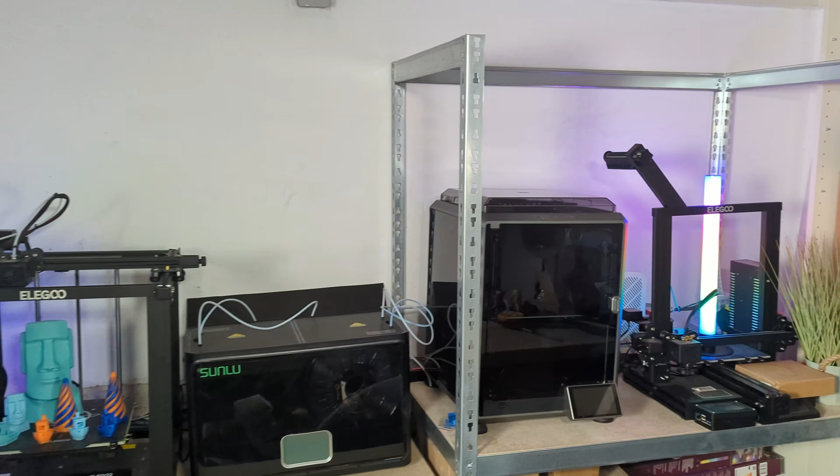And more importantly, who is a printer like this really for? Is this the perfect first step for a complete beginner? Is it a capable little workhorse for a seasoned enthusiast who needs a second machine? Or could this actually be the FDM printer that tabletop gamers have been looking for to rival resin quality without the mess and fumes? Today we are going to answer those questions.

We are going to push this little machine to its limits, from unboxing to high-speed prints and detailed miniatures, to find out if the Geeetech M1 is a toy, a tool, or something else entirely. Let's find out, and our investigation starts as always inside the box. Intro check complete. Engaging print protocols.

Let's start with the unavoidable unboxing and see what we get. There's a quick start guide and then another small brochure with additional instructions. We will see what it is when I set up the printer. A spool holder, then a small ring of filament to do the first test prints. Next there's a PTFE tube and some tools.

Besides an Allen key, a wrench, a needle and tweezers to clean the nozzle. The bag also contains a spare nozzle and an SD card. Furthermore, in the white box we get a 24-volt power adapter for the printer and a power cable. Finally, we have the Geeetech M1 Mini 3D printer itself.

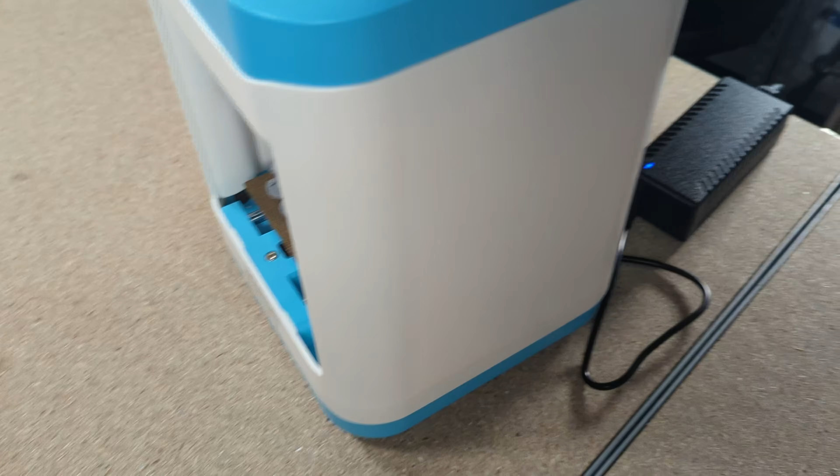So, the unboxing is done, and yeah, with its bright plastic housing it definitely looks like a toy. We've confirmed the first impression. But does it assemble as easily as a toy, or are we about to run into the complications of a real tool? Setting up this little 3D printer is as easy as following the steps outlined in the quick start guide. First, we remove the packaging from the M1 Mini.

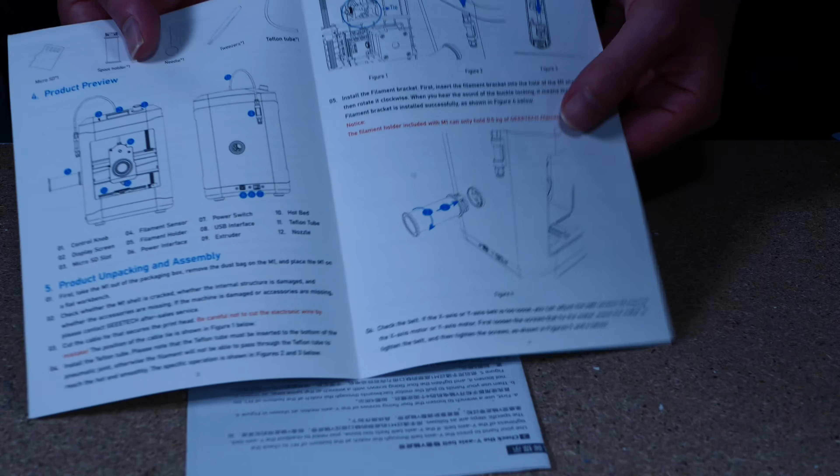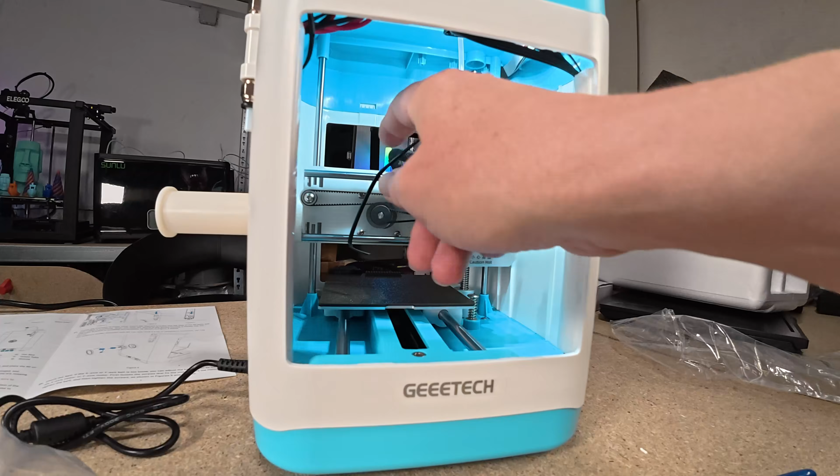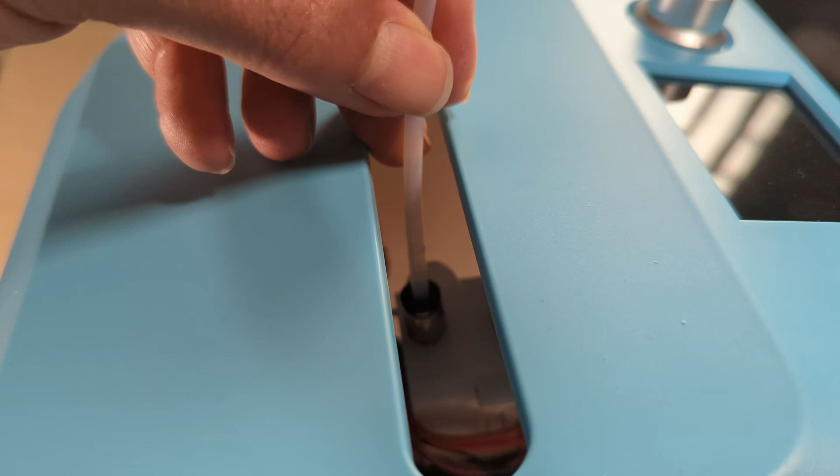Then we have to cut the cable tie that's securing the print head, taking care not to cut the wires inside. Now the Teflon tube has to be installed. One end goes into the filament run-out sensor and the other end is pushed into the print head. Make sure to push it until it doesn't go deeper, otherwise the filament may get stuck on the way to the hot end. The filament holder is installed at the side.

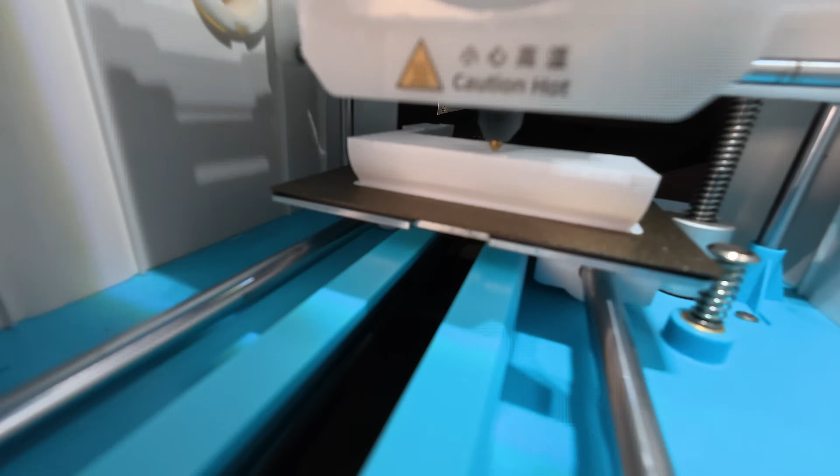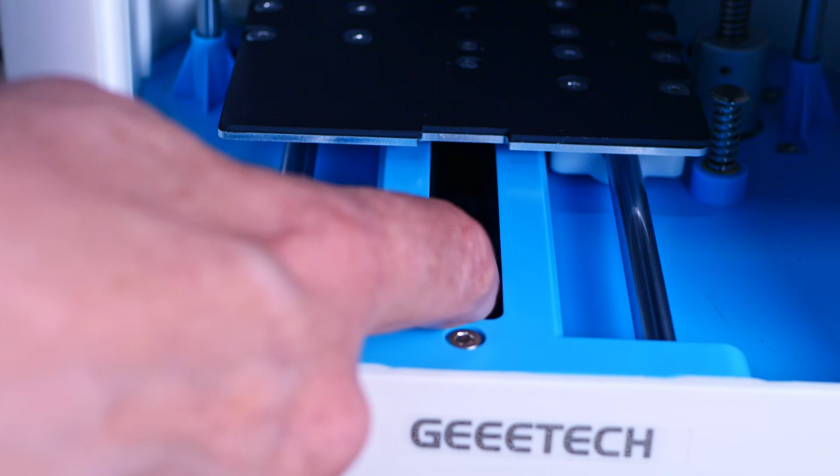It only supports 0.5 kg spools, but there's an alternative provided by Geeetech, which we can print using the M1 later, that can hold larger spools too. As a final step, we have to check if the X and Y axis belts are loose, and eventually adjust the belt tension following the detailed instructions given on the add-on paper.

And that's it. The physical setup was straightforward, just cutting a few cable ties, mounting the spool holder and checking the belts. So far it's certainly as easy as a toy. But the hardware is only half the story. The real complexity often lies in the software and initial calibration. Let's see if powering it on and leveling the bed is just as painless.

Ready for power on? Let's plug in the power adapter and turn on the M1 Mini. We should see the lights turn on and see the menu to operate the printer on the LCD screen on top. Before we prepare the first 3D print, we have to level the hotbed. There's a manual mode, but for convenience an auto mode as well. Turn the knob to select auto level and press it.

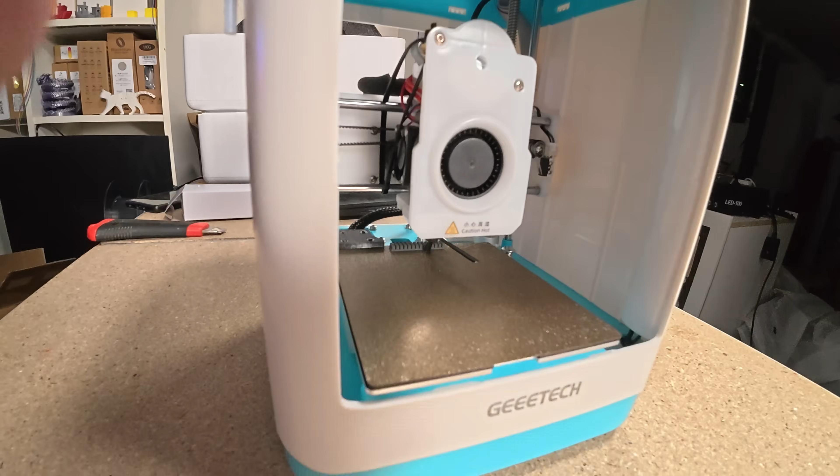Oh, okay, I overlooked one cable tie. Let's try it again. The printer homes all three axes, cleans the nozzle on the silicone pad at the back and then starts to probe the bed at 16 points. The nozzle cleaning makes sure that the probing is as accurate as possible. When finished, the display will show Geeetech M1 ready.

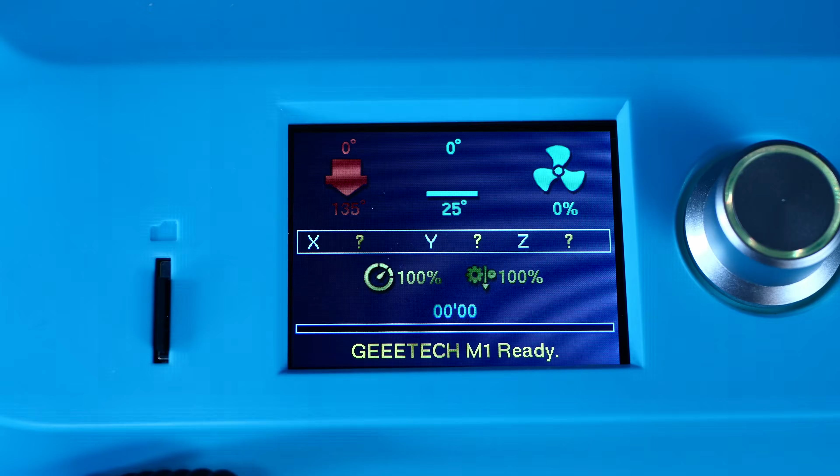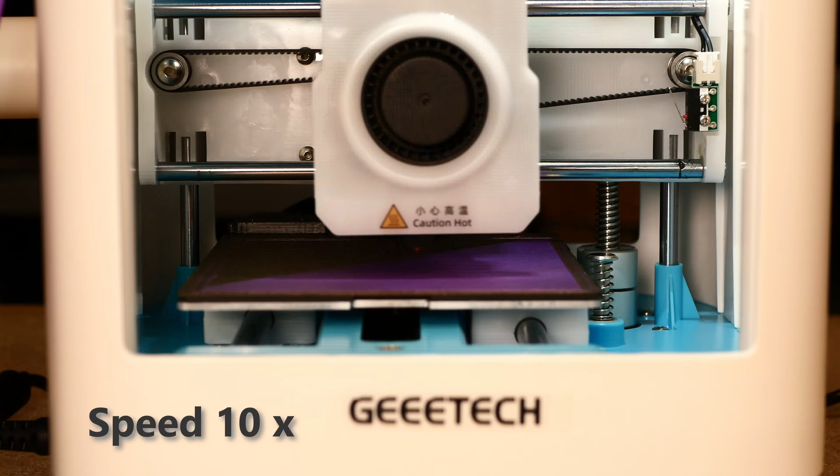Otherwise, it shows an error that we have to troubleshoot. But a perfect first layer is the foundation of every great print. So, after seeing that successful 16-point auto level, I wanted to put it to a serious test. I filled the build plate with a huge single layer square sliced at super fine 0.1mm layer height.

The result was okay, but as you can see, there are some small gaps where the lines didn't perfectly fuse together. This suggests that while the auto-leveling gets you very close, it might struggle with a first layer that fine across the whole plate. However, reprinting that same test at more standard 0.2mm gave a flawless result. A perfectly smooth, solid surface.

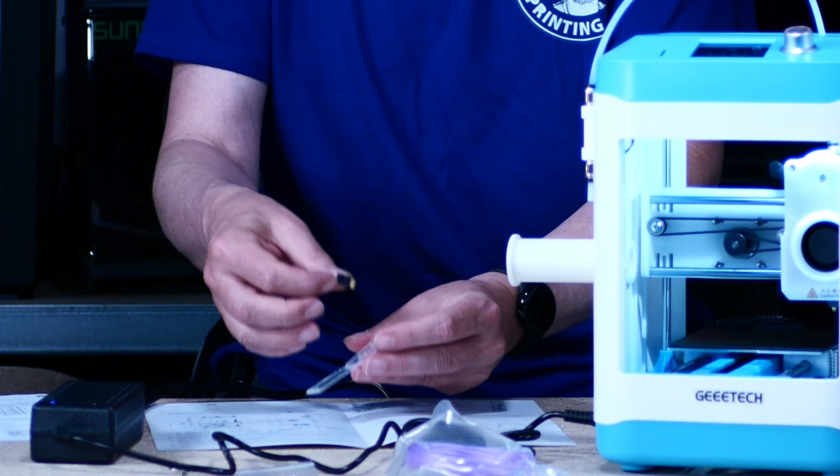That's a great tip to know. For this printer, a 0.2mm first layer seems to be the sweet spot for reliability. Before I explain how to configure the slicer to slice our models, let's check if there's already a test model on the SD card to do a first test print. I'd recommend making a copy of the microSD card so we have the files in case the card fails one day. But easy setup means nothing if the print quality is bad.

The SD card already has a Benchy on it sliced by Geeetech themselves. Can this printer deliver a decent result right out of the box in under 30 minutes? After inserting the microSD card in the slot next to the display, I select Print from Media. There are 3 pre-sliced G-code files. How else could it be, start with the famous 3DBenchy. The file name suggests that the print should last just under 30 minutes.

After selecting it by turning the knob, the print is started by pushing it and confirming to start the print job by selecting Print and pressing the knob again. The M1 homes, heats the nozzle to 135 degrees and then swipes it multiple times through the silicone nozzle cleaner at the back of the build plate. The hotbed and nozzle are heated to temperatures set in the G-code and it starts to print the 3DBenchy.

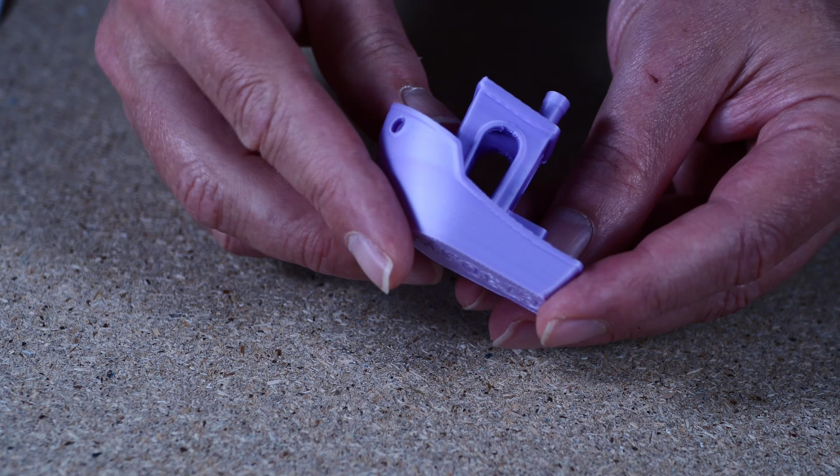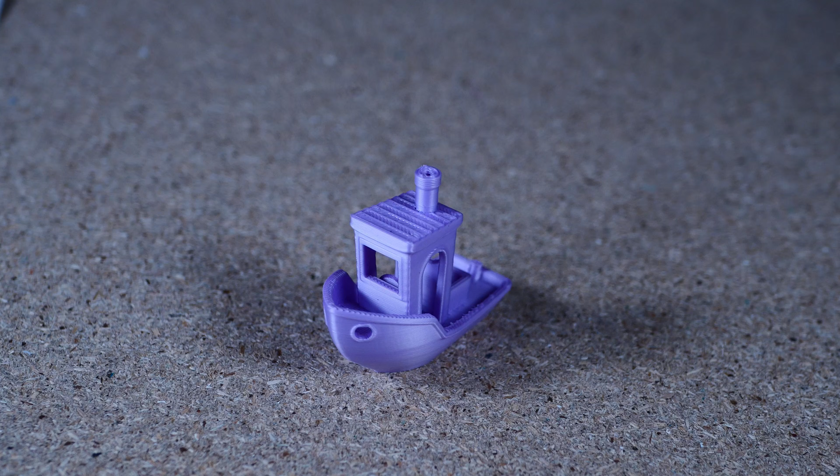The M1 not only finished the print in 29 minutes, but the result looks great too. If I had anything to complain about, it would only be that the chosen layer height of 0.25mm leads to this unsightly staircase effect, that the Z-seam on the chimney is too pronounced, and a minimal stringing which is really not worth mentioning. I can't see any ghosting or ringing artifacts, and the overhangs are also almost perfect.

There we have it. In just 29 minutes we have an almost perfect Benchy with no real issues to speak of. So it looks like a toy, sets up like a toy, but it prints like a serious machine. But why did it print so well and so fast? What's going on under this plastic shell that allows a printer this small to perform so well?

Now that we've seen the printer in action, let's take a closer look. The case feels stable and the mechanics look promising too. The printer allows access for maintenance from the front and back. It has no door. Because of this, it is somewhat noisy with this open design. On the left, we have a USB Type-B female connector with which you can connect your laptop directly to the printer to send G-code files for printing. I would have preferred to see a modern USB-C socket here.

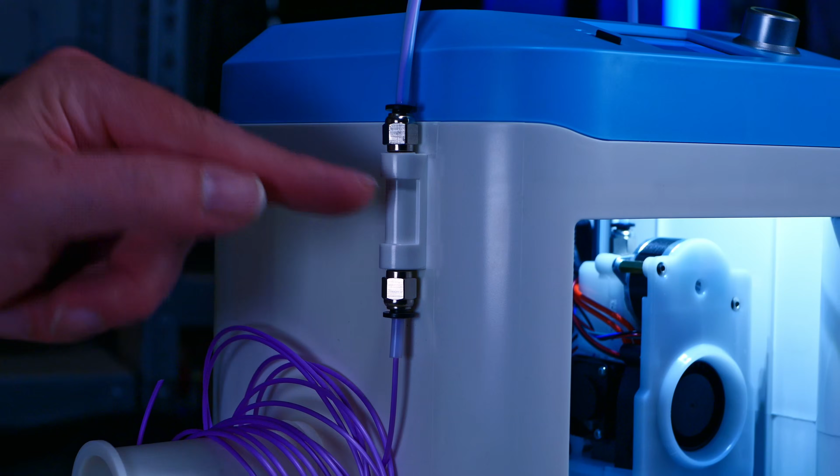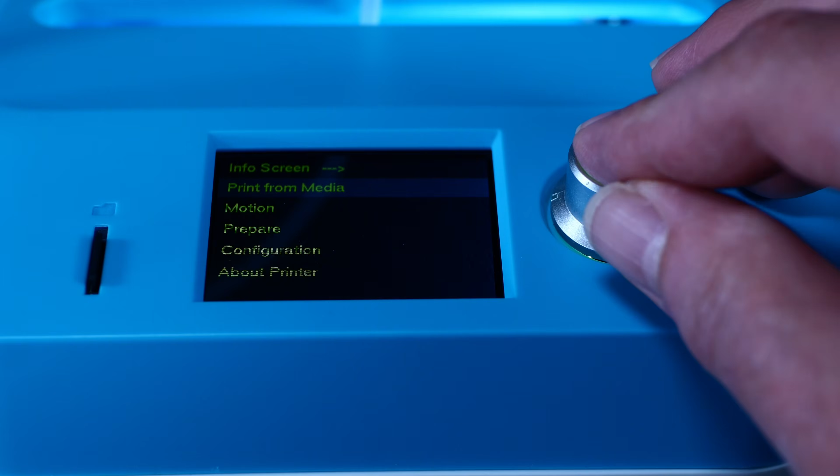Next to it is a power inlet and on the right the power switch. A little higher on the front left is a filament run-out sensor. It will pause printing in case it detects this. What I like is the fact that it can be disabled using the LCD menu on top of the printer. The menu on the LCD is structured in logical sections and the rotary push knob makes it easy to access and navigate through it. Let's step through. Push the knob to enter the menu. There we have Print from Media, Motion, Prepare, Configuration and an About section of the printer.

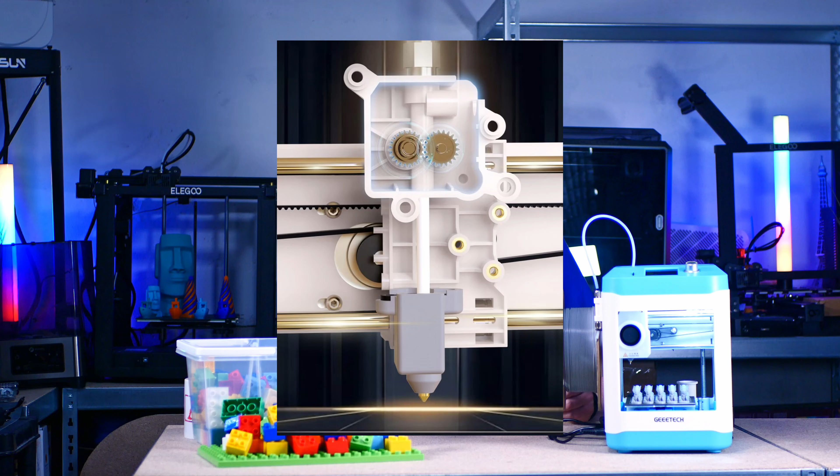The printhead carries a direct drive extruder using a NEMA 14 stepper motor, which should enable it to print softer filaments like TPU. I already have a functional TPU print in mind to test that. On the heated bed is a magnetic textured PEI plate. At its back it has a cutout through which the silicone nozzle cleaner is visible.

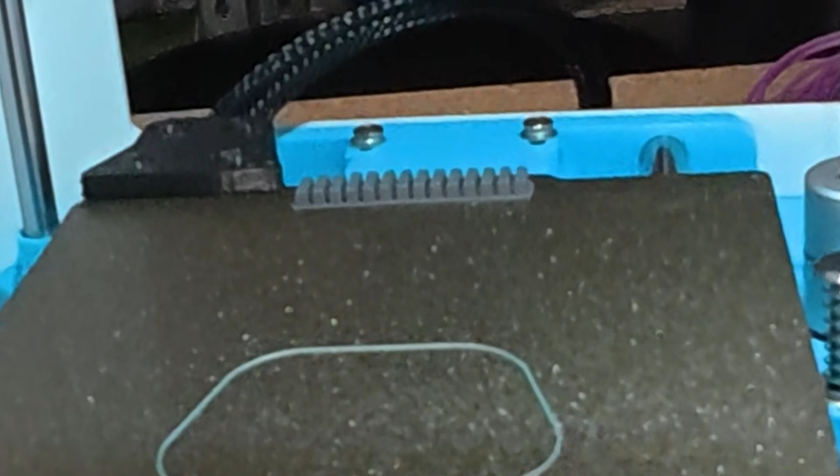Though you could level the Geeetech M1 Mini manually, it also has auto bed leveling that measures the print bed at 16 points. You don't need to do it for every print. Do an auto leveling when you feel that your prints start to fail. And while the idea of combining auto-leveling with an automatic nozzle wipe is great, it brings me to 2 firmware refinements I'd love to see Geeetech implement.

First, the temperature during that nozzle clean. It's set to 140 degrees Celsius, which feels too low to get some filaments properly soft for a clean wipe. Bumping this to at least 160 degrees Celsius, or ideally letting the user set it themselves, would make this feature much more reliable. Second is a homing sequence when you start a print.

The printer homes, cleans the nozzle, heats fully and then it homes a second time. This is risky. Homing with a fully heated nozzle can lead to a bit of oozed filament on the tip, potentially causing an inaccurate Z height for that critical first layer. The process should really be home, clean, heat, and then print. These aren't deal breakers, but they are kind of process refinements that would elevate this printer from good to great.

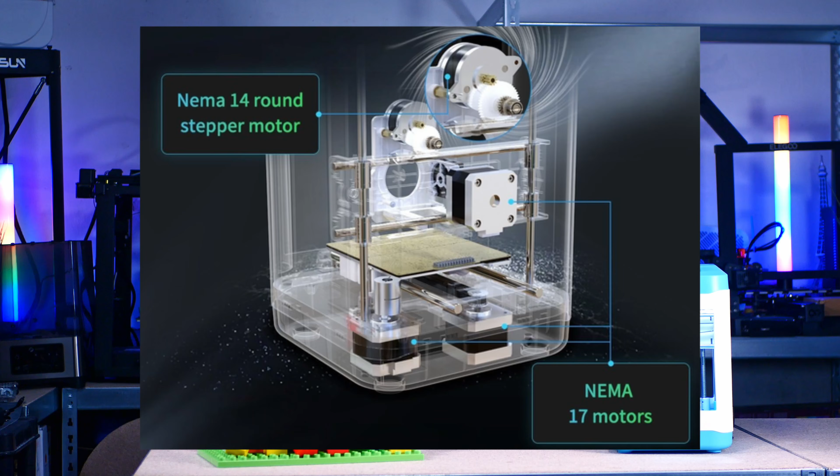During printing, 3 NEMA 17 stepper motors with their 200 steps provide enough power and precision to drive the X, Y, and Z axis. So, we now know the secret sauce: a solid Cartesian motion system with 3 NEMA 17 motors for precision, a powerful NEMA 14 direct drive extruder for filament control, and reliable auto bed leveling. This thing is packed with the hardware of a real tool.

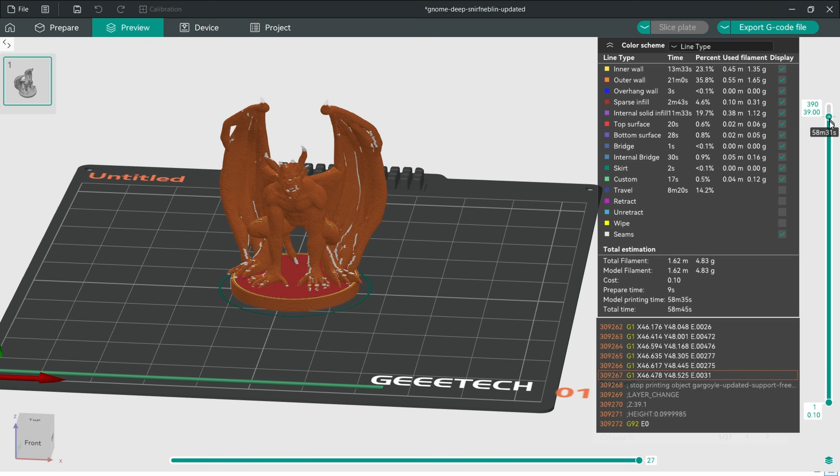So, we've established that the M1 is packed with great hardware, but great hardware is useless if you can't tell it what to do. How easy is it to set this printer up in a slicer to create our own files? Is it a plug-and-play experience or a nightmare of custom profiles?

Setting up the slicer is a no-brainer if you use a recent version of Orca Slicer, because it already has profiles for several Geeetech 3D printers, including the Geeetech M1 Mini. The only thing you need to do is open the printer settings, enter M1 into the search box, and it's there. The M1 has a 0.4mm nozzle, so just select that, confirm, and you're all set.

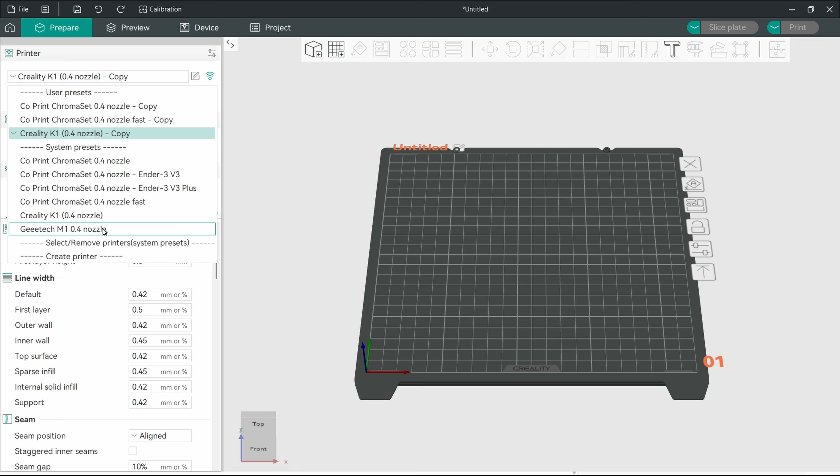If you prefer Ultimaker Cura, then the installation is a bit more complicated. You'll have to download the configuration files for Cura from the Geeetech wiki page. After extracting the files in the downloaded archive, you have to copy them to the correct path in the Cura installation directory. This requires you to confirm the UAC dialog that pops up when you try to copy them. Once done, you can add the M1 as a new printer in Cura and are ready to slice STL files using that printer profile.

And there's our answer. In Orca Slicer, it's an absolute no-brainer with a built-in profile. For Cura users, it's a bit more work, but still very manageable. Now that we have full control in the slicer, let's move beyond the pre-sliced Benchy. Can it handle a real technical torture test designed to push its limits on bridging, overhangs, and accuracy? To get a picture of the print quality of the M1, especially when printing at higher speeds, I sliced the micro all-in-one 3D printer test using a layer height of 0.15mm.

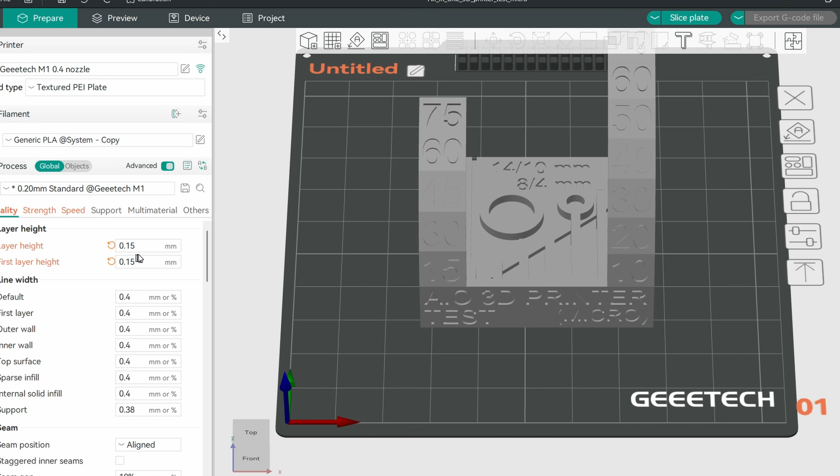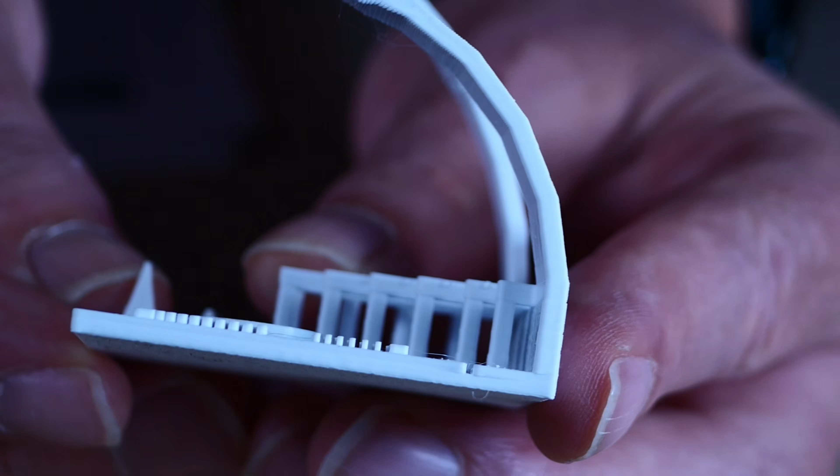The print took a little longer than an hour. Although printing with a 0.4mm nozzle, the fine feature gaps print okay to 0.2mm. The two cones printed nicely too, with their tips as sharp as one can expect from the nozzle size used. The bridges are good as well, and show no sign of drooping lines even for the 25mm bridge.

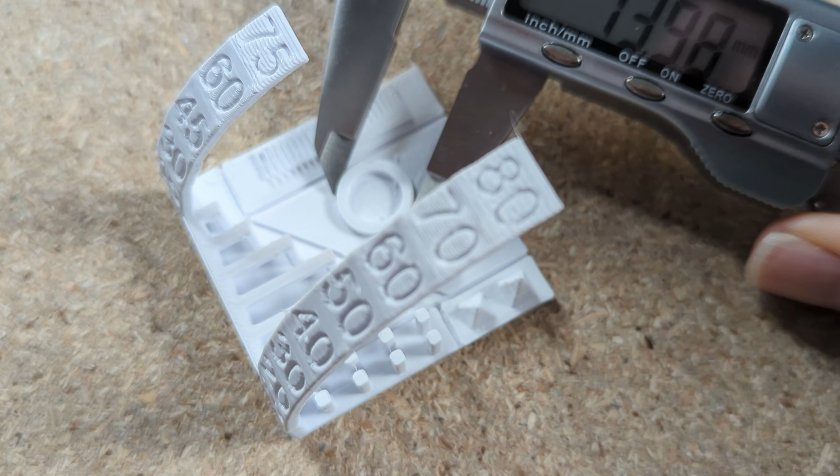The M1 handles overhangs of 70° without problems, but they start to get worse at 75°. The tolerances of the two circles are okay, with 13.9mm and 9.9mm for the larger outer and inner diameter, and 7.89mm and 3.72mm for the smaller circle's outer and inner diameter.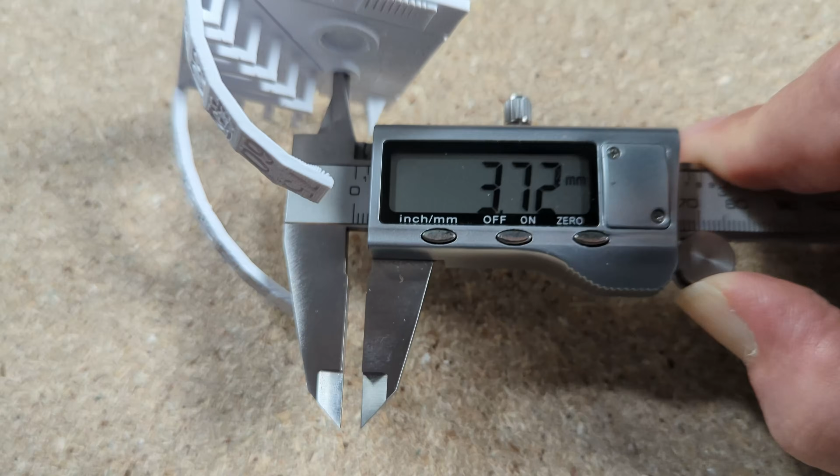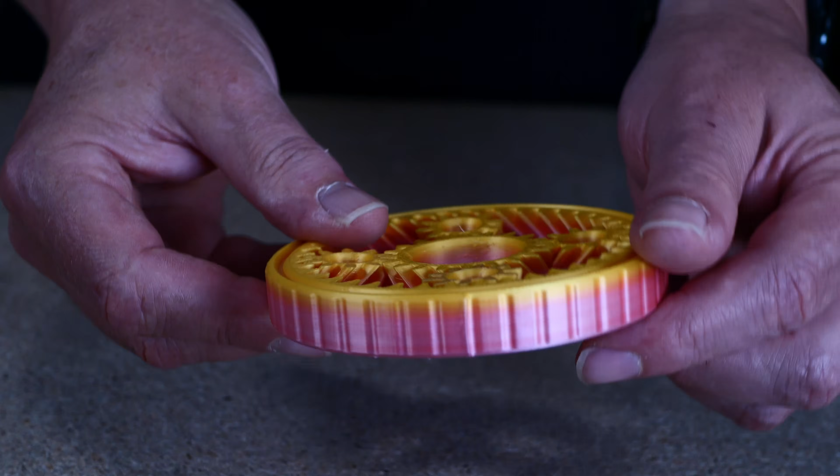But the ultimate test for a printer's accuracy and stringing control is a complex print-in-place model. So I sliced this planetary gear fidget toy to see if the M1 could handle it. I printed it at 0.2mm layer height, and right off the build plate it worked flawlessly, but I think it would have been even better printed at 0.1mm. The gears move smoothly with no bindings whatsoever. This is a huge win and proves the printer can handle complex mechanical parts.

However, if I am being picky, and as a geek I am, the tolerances could be even tighter. There's just a little more play in the gears than I personally like. So, while it's perfectly functional out of the box, an advanced user might want to fine-tune their slicer settings to dial in those clearances even further.

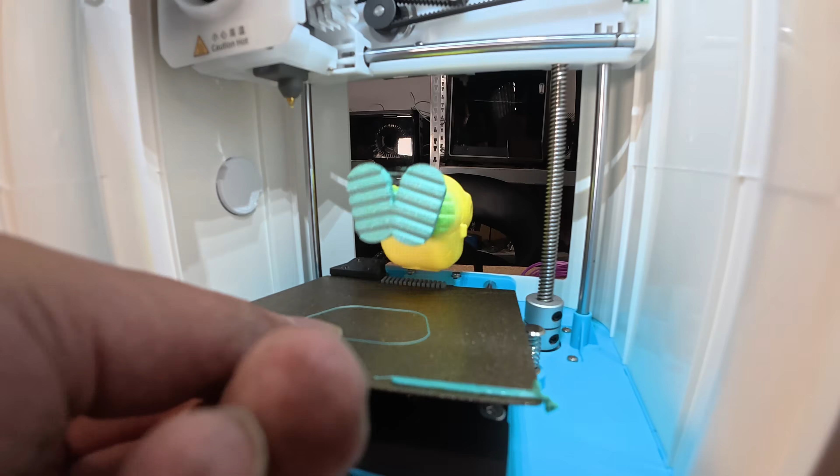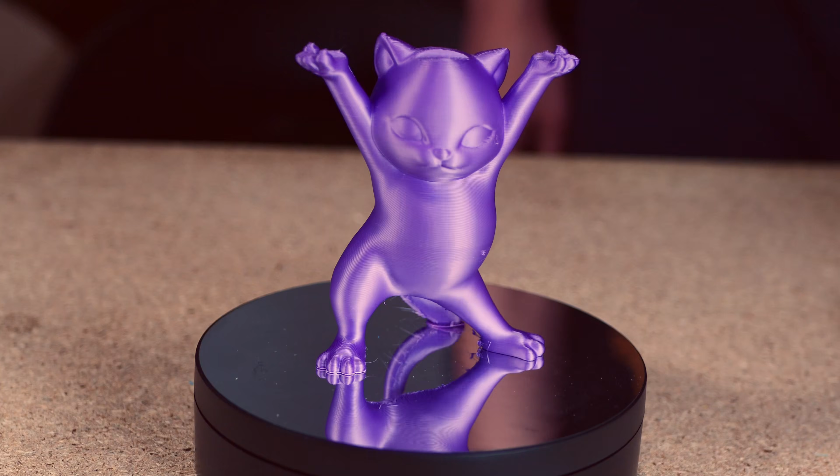But raw technical performance is one thing. Can that precision translate into aesthetic quality? Can this little FDM printer really produce the fine details needed for tabletop miniatures and challenge the world of resin printers? I printed Geeetech's Phil A. Ment Astronaut with this rainbow PLA. After roughly 1 hour 50 minutes, the print was done. The cat was printed with the Geeetech Violet PLA. Both prints look quite nice, and again, they printed without problems.

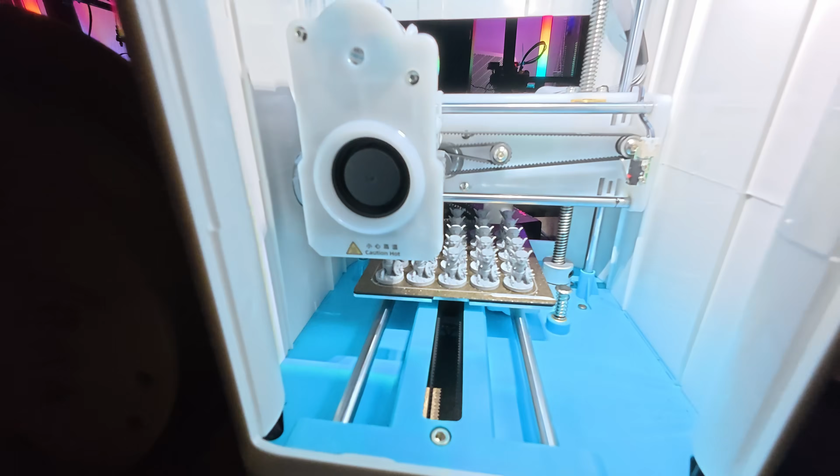Finally, I used some gray filament to print a goblin, a gnome and a gargoyle. The prints were made with a 0.1mm layer height to achieve the highest level of detail. I was curious to see how many of these figurines would fit on the small build plate. An overwhelming 25 goblins, which would finish in under 6 hours while just using 30 grams of filament. These were among the smallest prints I ever did on an FDM 3D printer, and the results are satisfying. It can print an entire army of goblins with impressive detail for an FDM printer.

In case you need even more detailed miniatures, you could try using a 0.2mm nozzle. So yes, it absolutely has the potential to be a tabletop gamer's new best friend. But printing an army of goblins takes hours. What's this machine actually like to live with? Let's talk about the day-to-day experience, starting with a couple of things that started to annoy me. I might remove the annoying piece of silicone near the heating bed connection with a craft knife.

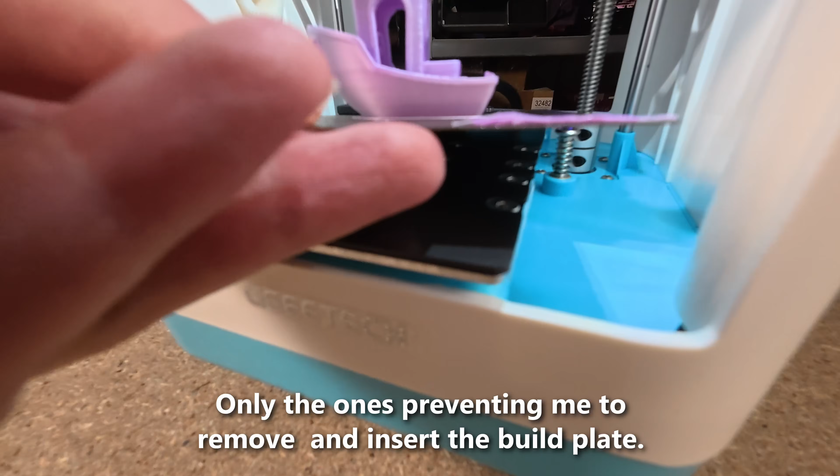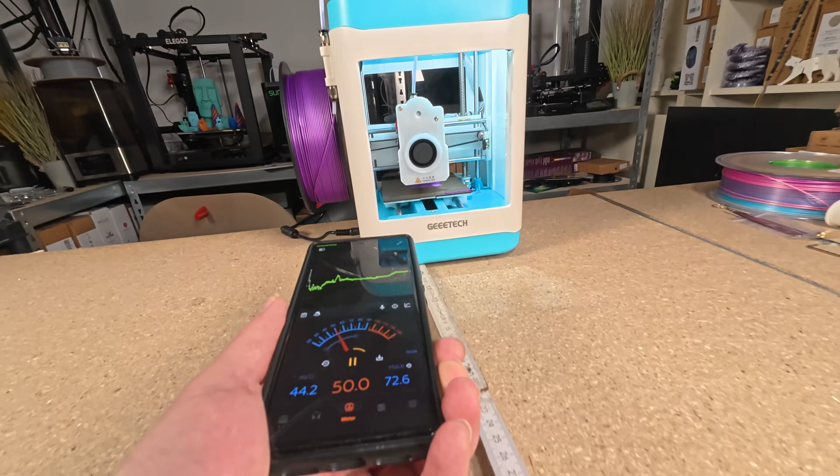Before we dive into a practical application printed in TPU, let's take a look at the noise levels. I measured it at distances of 1 meter, half a meter and directly in front of the printer. At 1 meter I got about 40 to 43 dBA, which is considered relatively silent, comparable to the humming of a refrigerator. This doesn't change much at 0.5 meter, only directly in front of the printer the noise level rises to around 50 plus dBA. This is still considered moderate and comparable to the background noise in a large office.

Nevertheless, I wouldn't put it in my living room and absolutely not next to a kid in their bedroom. So, while it's not silent, it's quiet enough not to be a major disturbance in a hobby room. But combined with the fiddly build plate, you can see it's not without its quirks. We've seen its precision and tested what it is like to work with, but we still haven't checked one key feature promised by its direct drive extruder.

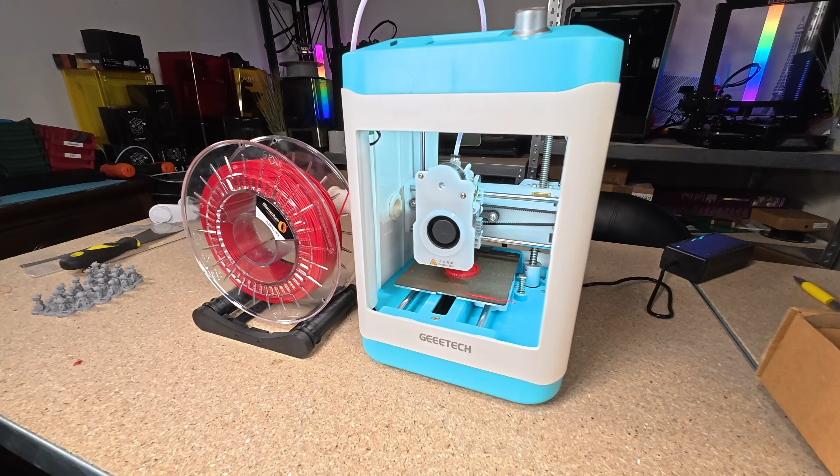Can it handle TPU? With its direct drive extruder, the M1 should have no problems printing TPU. To test that, I print a lens cap for my Osmo Action 5 Pro using a red soft Fillamentum 92A TPU. The print goes quickly, and within a few minutes I have an additional protection to put over the already installed lens protection of the Osmo Action 5 Pro. And just like that, a perfect functional lens cap printed in soft TPU. So yes, it absolutely passes the flexible filament test with ease.

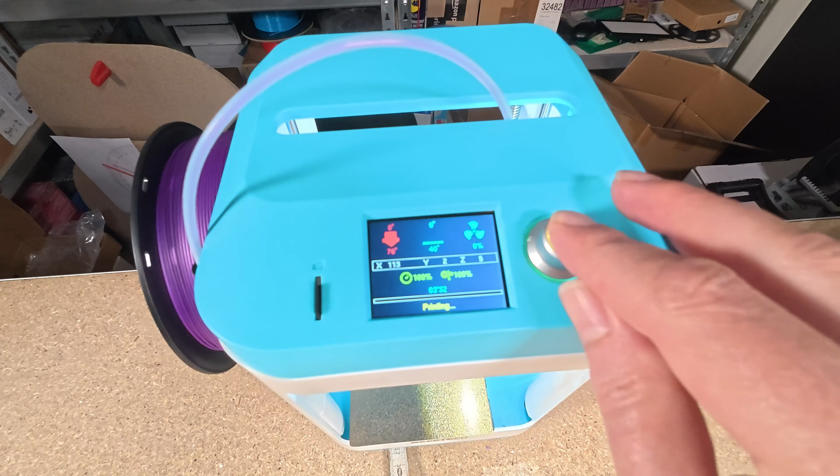The printer is versatile, but during all this testing I did notice one more little quirk. While I was recording the video, I noticed a soft squeaking noise as the printer heated up for a print, which was later drowned out by the component fan. Maybe it's a fan on the control board. I'm not worried about it yet, but I will keep an eye on it. Maybe you can hear it in the video.

With the excellent maintenance instructions, replacing the fan should not be a problem if it fails. So, it's a minor noise that I'm not too worried about yet, especially with the great documentation for repairs. It's just another one of those little personality quirks of this machine. Okay. We've looked at everything from its performance and features to its noises and annoyances. Let's put it all together and lay out the definitive list of pros and cons.

On the pro side, it delivers a good print quality, sometimes even excellent. Its speed is really good for a Cartesian 3D printer of this size. I also like the bright lighting inside the case. As we saw, it's ideal for printing miniatures and tabletop models without the hassle of dealing with toxic resin and its fumes. Furthermore, it's lightweight, not hard to find a place for it. Geeetech provides an excellent wiki with in-depth setup, maintenance, repair and troubleshooting instructions.

Larger spools require a filament roller, exchanging the spool holder or feeding it from a dry box. Then you may quickly want a larger build space. 100 x 110 x 100 is very limited, though it's okay for many 3D prints. The Geeetech M1 Mini has no Wi-Fi to upload and monitor the 3D printer, and with no Wi-Fi it comes that it has no camera to watch the printer remotely. You must stay close to act on failure.